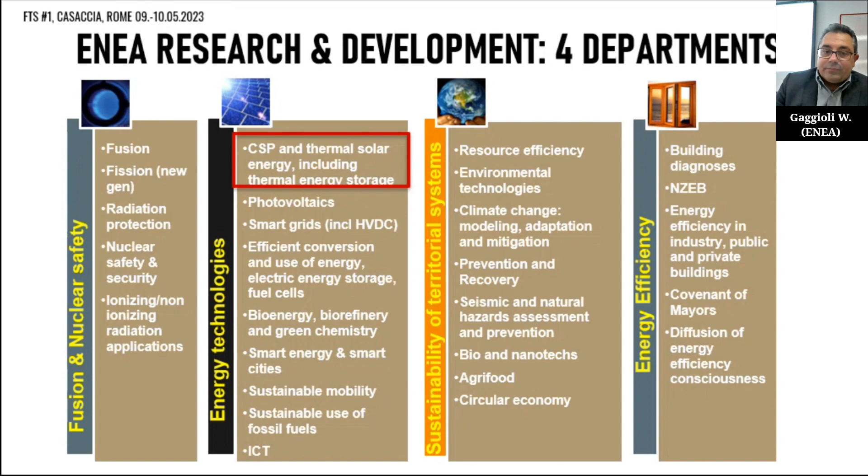The facilities of ENEA are distributed all along Italy. The facility for the division is divided into 3 laboratories. The first laboratory is oriented to develop technology for solar thermal applications.

The responsible for this laboratory is Michela Lanchi. The second laboratory is the technology engineering laboratory, to support the Italian system in building CSP systems, with or without molten salt technology.

The third laboratory is the smart grid laboratory, oriented to study how to couple the thermal storage system, the CSP technology, and in general different renewable sources, into the smart power grid at the local level.

The facilities of the division are concentrated mainly in 3 centers. One is Casaccia, where we are now. The second is Portici, near Naples, where they develop special coating and smart grid applications. The third facility is in another research center in South Italy, Trisaia, near Puglia.

About the facilities present at Casaccia, here all the facilities are already listed. For reasons of time I won't list them all, but tomorrow during the visit you can ask for information about the different facilities.

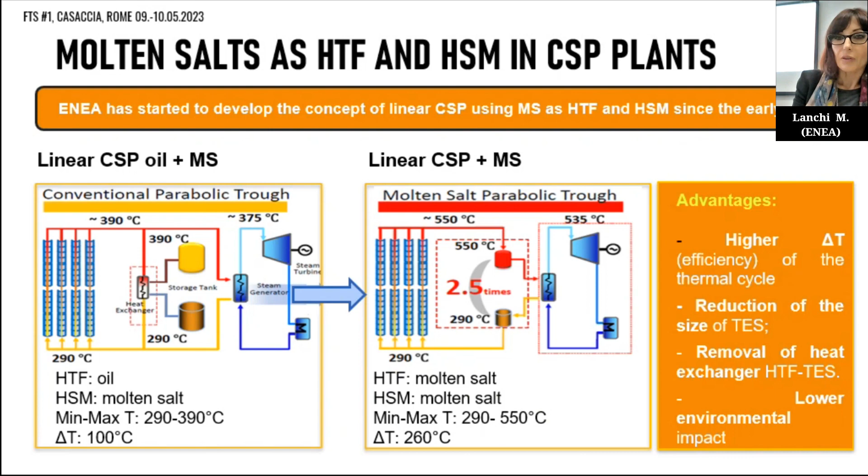Referring again to ENEA, the development of the MS technology, from the design of the components to the realization of the first Italian commercial plants, has required something like 15 years, passing through laboratory testing of components and materials, through the realization of a real-scale facility for characterization of components in a real environment, and through the realization of demonstrative plants like the Archimede plant and the MATS plant, which was realized in 2018 within a European project coordinated by ENEA.

This is a cogenerative plant which produces electricity and desalinated water.

And currently, not working.

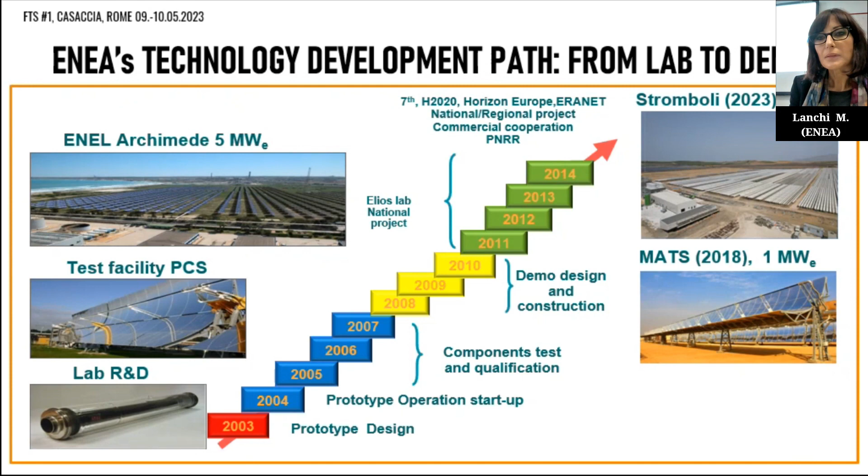Currently, the ultimate research objective in this field is to enhance the energy performance and reduce the cost of this technology. The research activity carried out by DLR, ENEA, and the University of Évora in this field is supported by the use of unique experimental infrastructures, unique in Europe, which can be used for the real testing of real components in a real environment, but also for testing procedures and operational procedures.

Here you can see the PCS plant located at the ENEA Casaccia site, which will be visited tomorrow by the on-site attendants, and the HPS2 molten salt loop of Évora, which is a full-scale molten salt pilot CSP plant, and this facility of DLR located in Cologne.

And now, after this very quick introduction, let's start with the course.

This first edition of the fast track school includes molten salt focused lectures dealing with basic research topics and state of the art, and also a research brainstorming. Particularly today we will have a very quick overview on the use of molten salt in CSP plants, and also for the application of providing heat to industrial processes.

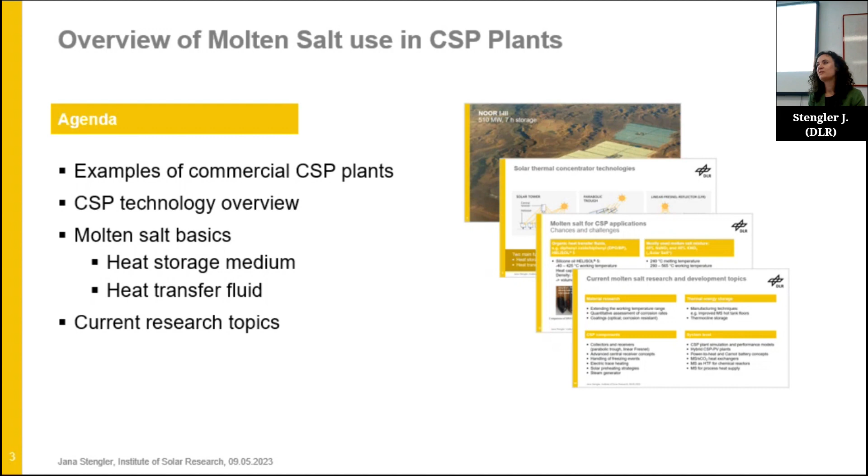So what we're going to cover is examples of commercial plants as a start. We'll have a look at different technologies for CSP very briefly. Then we'll look at molten salt, or the standard solar salt that's been used as heat transfer fluid, but also as heat storage medium. And then we'll look at current research topics to give you an idea about the structure of this fast track school, so you have guidance for the next topics or talks.

So another example that I picked is Andasol. It's the first parabolic trough project that we had in Europe, at least the first commercial one. It was commissioned in 2009, so it's a pretty impressive plant in the south of Spain. Maybe some of you already had a chance to see it.

It's parabolic trough. Then another example that I picked, Gemasolar, also in the south of Spain, with 20 megawatts. It was the first utility scale or commercial scale tower system in Europe, and only a couple of years later, this one was commissioned in 2011, and in 2015...

In the United States, we had the project of Crescent Dunes, also a tower with molten salt. So it's a bigger project with 110 megawatts. So you get a pretty nice impression about the different technologies and how they developed.

There's also a couple of examples from China. I just picked one - it's the biggest linear Fresnel project that we have in the world. I think it was only the first Fresnel project in China. It went online in December 2019. It has 50 megawatts rating and 15 hours storage. It's a linear Fresnel with molten salt also as heat transfer fluid. So this gives you an impression about the different technologies that we're using.

For example, there's solar towers, there's parabolic trough, and there's linear Fresnel. So it's point focusing technologies, but also line focusing technologies. And for line focus, I chose parabolic trough and linear Fresnel. Linear Fresnel basically has several facets, so they have smaller curved mirrors, but they also aim the solar irradiation onto one line focus.

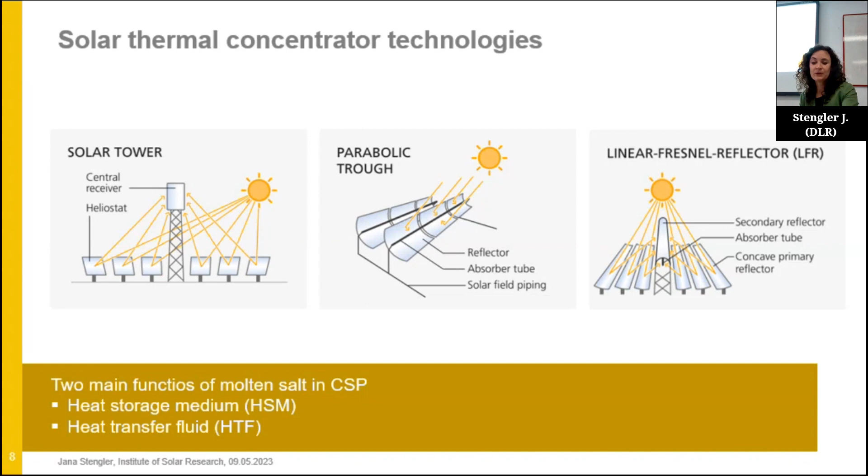And so the molten salt that we use here has basically two functions. You can use it as heat storage medium, that's where it came from - also all power plants or CSP plants already feature molten salt as heat storage medium. And the newer use case for molten salt is to use it as heat transfer medium in point focus and line focus systems.

So let's have a look into molten salt tower technology. How does it actually work? So the standard would be to have a 2-tank system. You use cold salt and circulate it through the solar receiver, heat it up, and then you can directly use it to produce steam, or you can store it in a tank and use it later.

So you have one component that connects the molten salt loop to a conventional power block. And the rest is basically a turbine, steam generator, and so on, as you know from conventional power plants. So you have that conventional power block and two use cases of molten salt. And basically there's a lot of experience on large-scale thermal energy storage with molten salt.

It's state-of-the-art. And for using molten salt as heat transfer fluid, there was some experience in France in tower systems, but also in the United States later in the 90s.

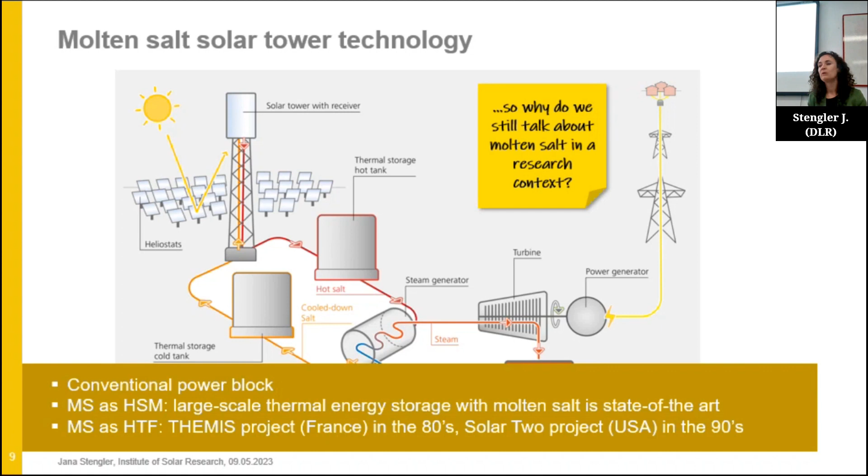So having heard that history, and also having heard Michaela's introduction about the history of ENEA and working with molten salt, you could definitely ask yourself the question: why are you still talking about molten salt here in a research topic? And I guess this is the question that we will answer during this fast track course - to show you what the developments are, what the open research questions are, and also on utility scale.

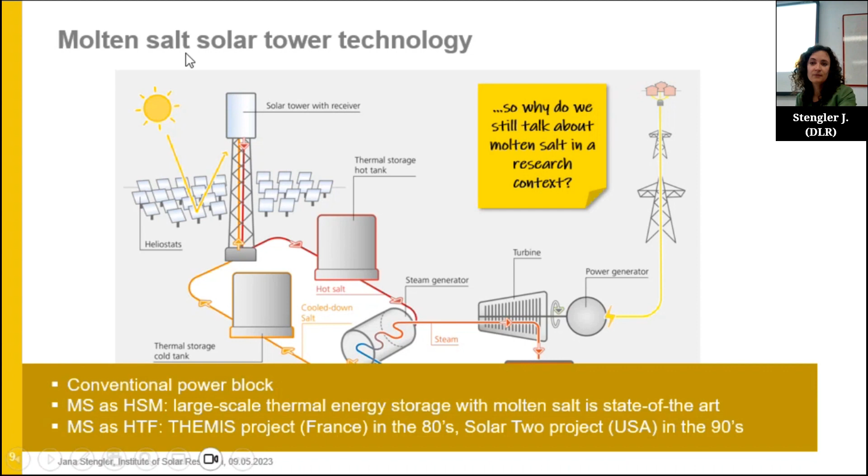Coming back to that first photo I had, that first Morocco, the NOOR facility. What they have installed here is a solar tower plant with molten salt as heat transfer fluid, with storage tanks also using molten salt. There was a project that went online in 2016 and 2018, so it's still state of the art, but they still use oil as heat transfer fluid in the parabolic trough.

Let's have a look into the scheme. We briefly had this before, but let's put it down. In a utility-scale, state-of-the-art parabolic trough CSP plant, you would have one circle in the solar loop with thermal oil, then use a heat exchanger to have another loop with molten salt to store thermal energy and produce energy during the night. Then there's another loop with thermal oil so you could generate steam.

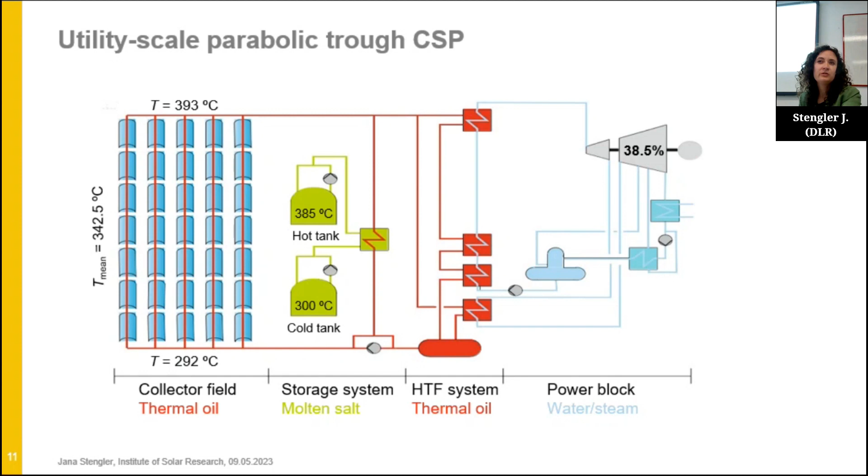If you look at the working temperature, the good thing about organic heat transfer fluids like Helisol is you could use them below freezing point, below 0 degrees C. But it's limited to temperatures up to 400, maybe 425 degrees C. The heat capacity doesn't look too bad actually, but considering the low density, it results in a rather low volumetric heat capacity. That's why you wouldn't use it as storage material, but use molten salt instead, since it ends up having a higher volumetric heat capacity compared to organic heat transfer fluids.

The standard salt mixture used in CSP plants is solar salt, a mixture of sodium nitrate and potassium nitrate. There are other mixtures which we'll cover later in this fast track school. It has about 240 degrees C melting temperature, so you need to make sure every single component of your plant is equipped with trace heating, so you stay safely higher than 250, 260, 270 degrees C. That limits your lower operating temperature.

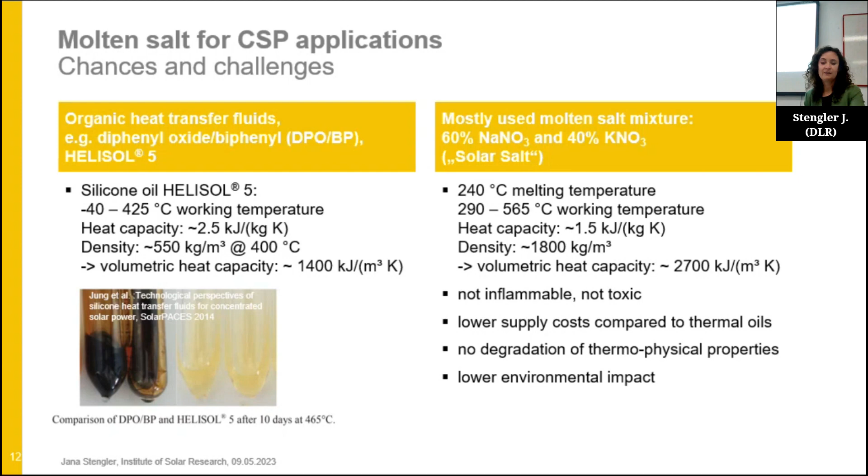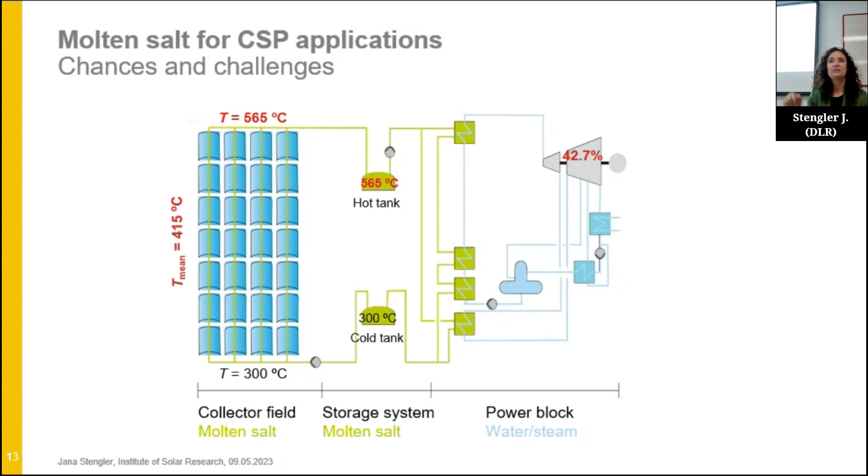So let's assume you replace the thermal oil in the solar loop with molten salt. That has several benefits. First, you can increase the temperature in the solar field itself, but also in the storage tank. You don't have to add additional heat exchangers. I'll quickly jump back - you can go directly from the loop in the solar field to the steam generator, to that heat exchanger.

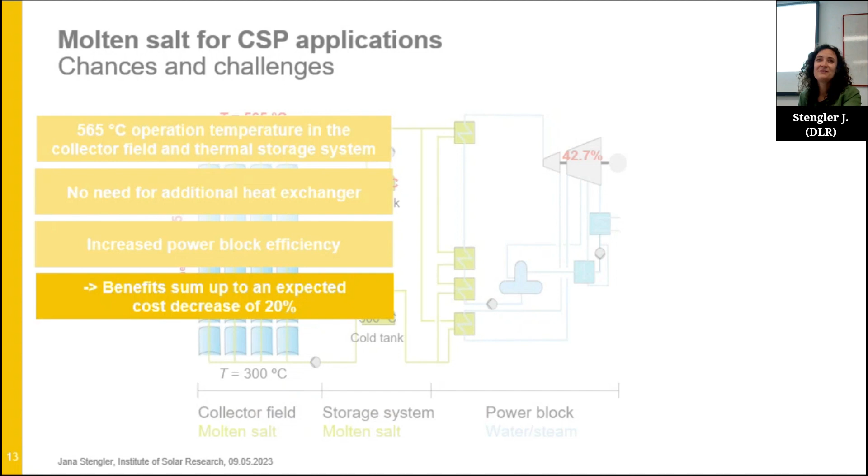With fewer components and higher operation temperatures, you can increase the efficiency of the power block, and in the end that leads to a cost decrease. These numbers are a bit older, but we've done the math, and we expect you could get a 20% cost decrease from this higher efficiency in the overall power block, and also from having fewer components such as heat exchangers. But of course, these benefits don't come for free.

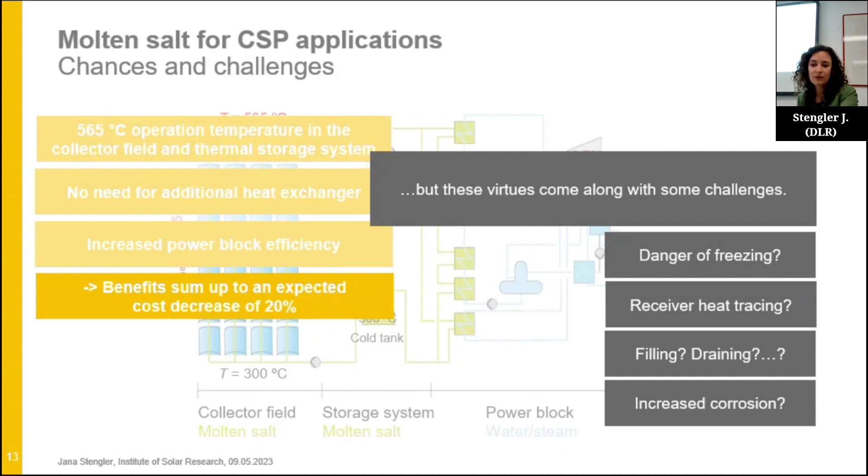Some of those challenges are tackled at ENEA and also at DLR and at the University of Évora. That's a teaser for you to sign up for the next fast track schools as well. One of them will be held in Évora, where colleagues have a research facility for different topics around molten salt, for example, using molten salt as heat transfer fluid in parabolic troughs. I won't go into detail, it's just a cliffhanger for the next fast track school.

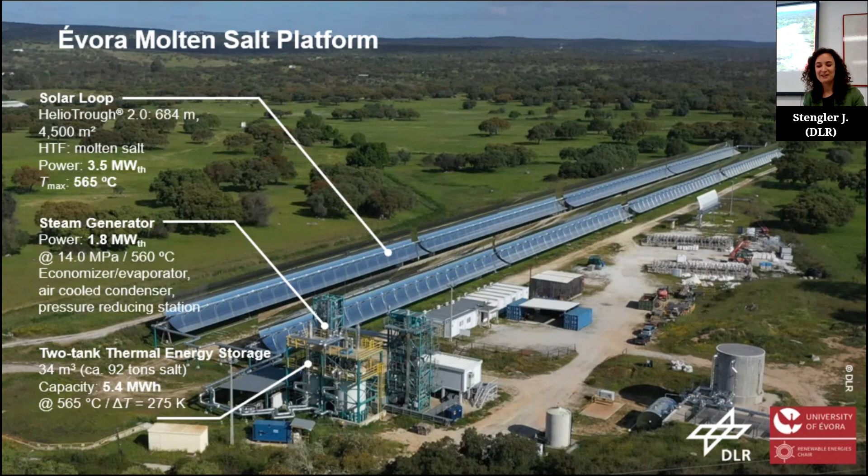That's the exact reason why we have this school here, why we're still talking about molten salt research topics. Because there are some industrial projects, but it's still hard for us to have insight on this.

So my last slide, some ideas, some approaches about new research topics. It's not a complete overview, there will be many missing topics. I try to break it down into 4 different fields. Of course they sometimes overlap, so it's not a clear structure, but it also kind of reflects the agenda that we have for the rest of the fast track school.

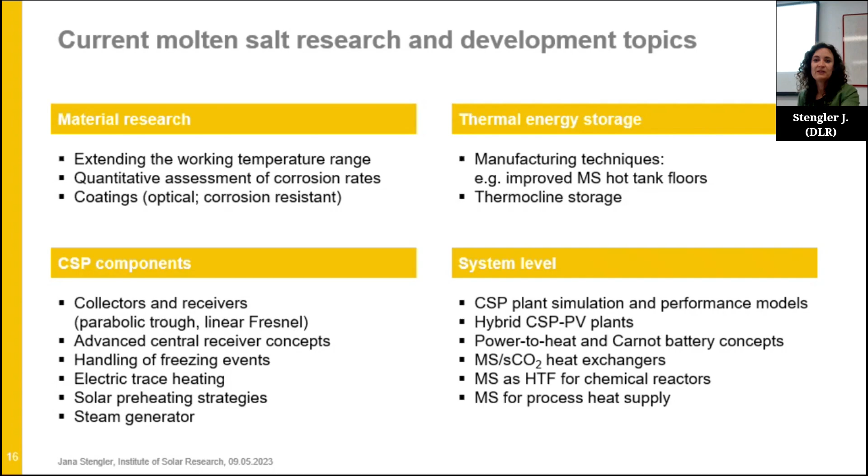This is again a photo that I took only 4 weeks ago when I had the chance to travel to Évora. Again, that's a teaser for you to sign up for the next fast track schools. I'm pretty excited to see your facilities tomorrow here in ENEA. So thank you very much for inviting us.

You're welcome. Let's hope that we will not be forced to visit the facility under the rain, but let's keep our fingers crossed that the weather will be as here on that photo. So with this, I'm thanking you for all your interest and attention, and I hand over to the next speaker. Thank you very much.

Okay, what is process heat? I guess this is broadly known by all of you, but basically we are talking about the use of energy for warming industrial spaces, of course, but especially for use in industrial processes. This is actually the core of process heat applications, the use of heat in industrial processes.

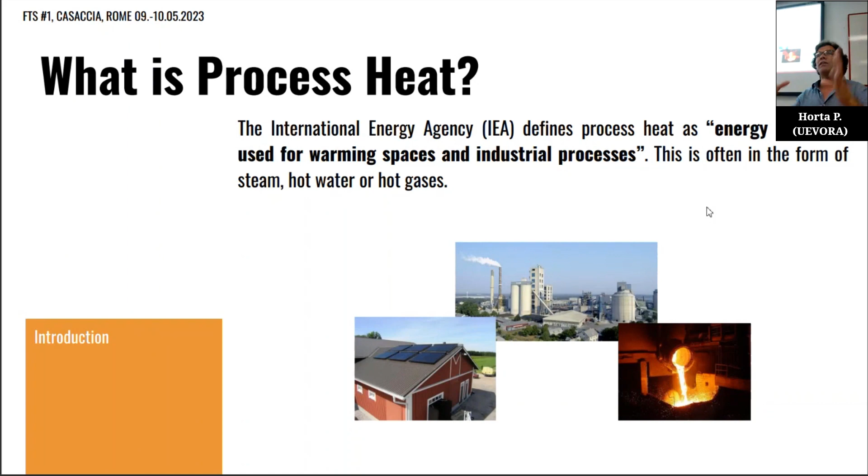If we look into what that means in terms of final energy consumption worldwide, we can have a good estimate. Taking International Energy Agency numbers of 2019, the industrial sector accounted for about 29-30% of total global final energy use. This is total, includes everything, transportation sector as well. Roughly two-thirds of that is used in the form of heat, so we are talking about 20% of the overall worldwide energy consumption. This is process heat, so it's definitely a very significant share of our energy consumption.

One thing which is clear today is that process heat can be a number of different things, and we can classify process heat in terms of its temperature level. We have applications at low temperature, whatever processes occur below 100 degrees - there are a number of them. Then we have medium temperature, processes occurring between 100 and 400 degrees. I must refer here that it's sometimes 100 or 150, 400 or 450, so there are some discussions in this field, but roughly 100 to 400 degrees is the range we name when we talk about medium temperature applications, and then above 400-450 degrees we have high temperature applications.

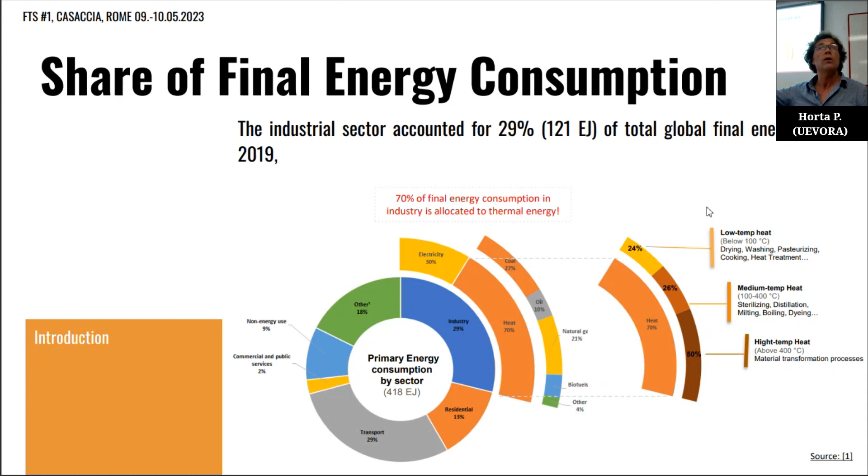So if you look into the share of energy used in processes according to these different categories of temperature, we see that low and medium temperature account for roughly half of these consumptions. The other half is accounted for by high temperature processes. So roughly 10% of the total worldwide energy consumption is in industry in low and medium temperature, and 10% of the total worldwide final energy consumption is in industry in high temperature processes. So, something we should take a look at.

Well, we have already seen that molten salts are an interesting heat storage or even heat transfer fluid. It has good thermal stability, low vapor pressure. How could we use, or how could we heat these molten salts?

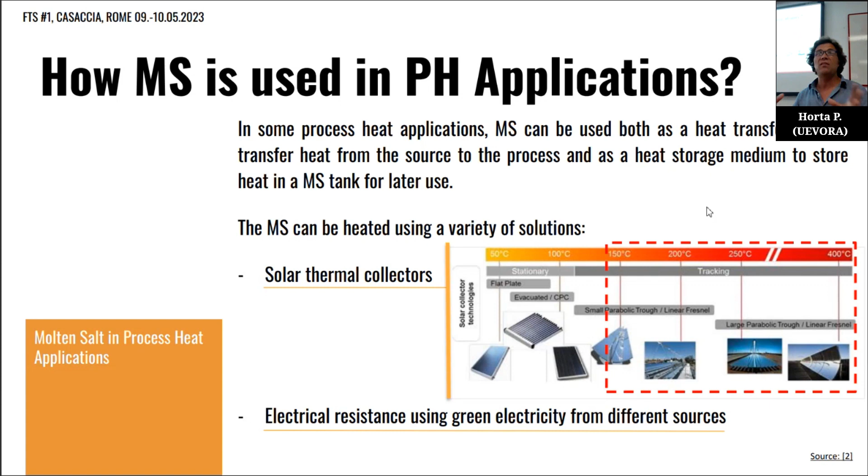Well, of course, with solar thermal collectors, and we have seen here a number of examples of such collectors, and definitely very impressive applications on thermal power generation through CSP. But we could also use green electricity with resistive heating to heat molten salts. So we have definitely the possibility to incorporate different renewable energy sources. So directly solar energy through thermal conversion at medium or high temperature, as we have seen, but also, why not, solar energy through photovoltaics or wind power or wave energy or other forms of green electricity generation. And then using resistive heating to heat the molten salts.

So roughly, if we take the most common solar process heat application and integration, those who are accustomed to process heat topics have already spotted that we are talking about integrating solar energy at supply level. What does that mean? That we are going to integrate this alternative renewable energy source close to the energy supply system already in place. Normally, this is a boiler, generating steam by burning some fuel, biomass or fuel oil or whatever, natural gas most of the times. So we might have a system which in parallel is able to also produce steam alongside the boiler.

So we are integrating this new energy source at supply level. We are not going directly to one process. Industrial users are not very keen on touching their processes. That's something, to those of you who are not very knowledgeable about process heat, I can tell you already. They don't want to touch their processes. If you do something around the boiler, well, they can overlook it, but not in the process. So this is the most traditional way of integrating solar heat into a process heat plant.

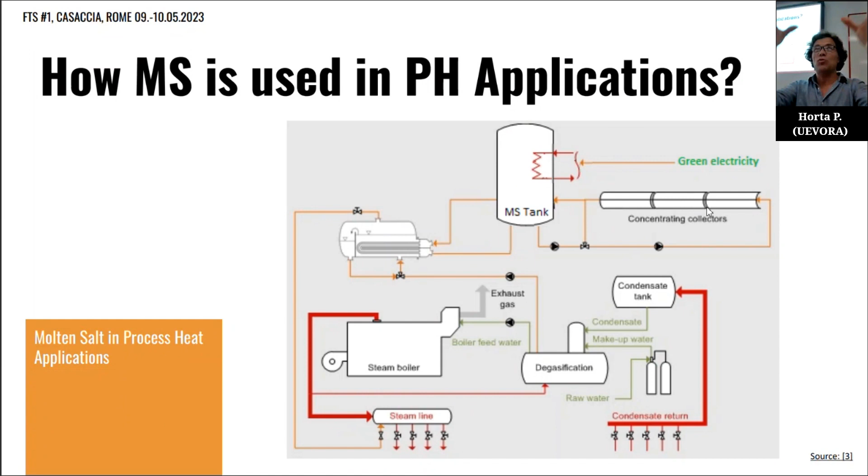And so using these hot molten salts, we could then have a heat exchanger, molten salt to water, to produce steam, and then integrate the steam in the steam distribution network of an existing facility. So this could be one way. There are others, but this is, I would say, the most typical way of introducing molten salts as a means to store energy and to integrate renewable energy in a process heat system.

So as my colleague Jana Stengler already mentioned, why molten salts? Well, they have some interesting properties. They have high heat capacity, basically double what we can see in thermal oils. Excellent thermal stability, very resistant to degradation over cycles, so much better than thermal oil as well. High thermal conductivity, and this is very important whenever we consider the use of such a heat transfer fluid with heat exchangers.

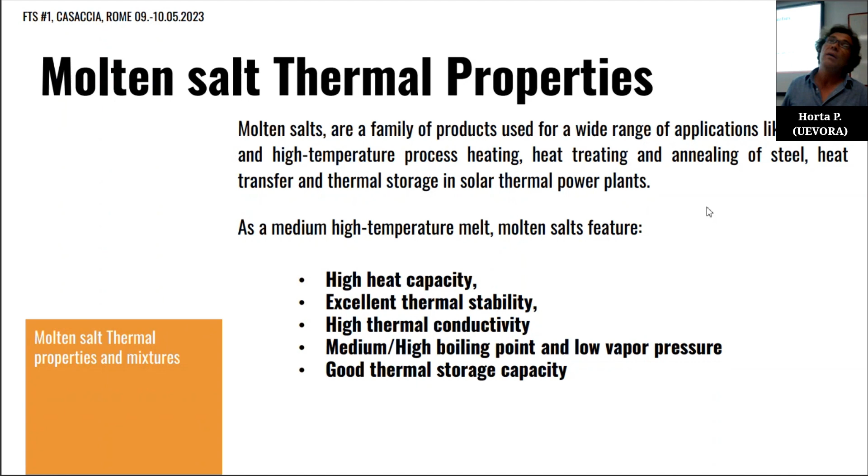This is a very important property. Another extremely important property is that we are dealing with low vapor pressure, which means that if we want to use it at 300 degrees, you know what that means if you have a steam distribution network? 300 degrees, you're talking about extremely high pressures. This is not the case with molten salts. So regarding pressure constraints, we remove them out of the picture, yet there's something we need to deal with: the medium or high boiling point. So these systems need to be prepared to prevent or to operate including the event of salt crystallization. This needs to be foreseen. On the other hand, we also have seen that we have a very good thermal storage capacity, which means we can have more compact storage systems when compared with thermal oil, or even with steam storage, which is a possibility, but not for very high capacities, as we all know.

So looking now into molten salt mixtures, there are different types of mixtures. Tomorrow we will have a lecture on molten salt mixtures where you will see these things in detail. Roughly we can see that we have nitrate-based, chloride-based, or fluoride-based mixtures. The mixtures which have been worked, researched, at least in the solar energy fields, are nitrate-based mixtures.

And most of all, it's called solar salt. We are talking about potassium nitrate, sodium nitrate mixture. This mixture is very well known today. It's state of the art. It's used in commercial plants.

It's very good in terms of chemical safety. It's compatible with standard stainless steel alloys, so we will find stainless steel components to deal with all the hydraulics we need. This is definitely important if we want to bring these into an industrial, into a commercial use. It has also the potential to be operated at rather high temperatures, so much higher than thermal oils, much higher than steam distribution networks, especially if we don't want to deal with extremely high pressures. So we can operate the systems up to 565 degrees.

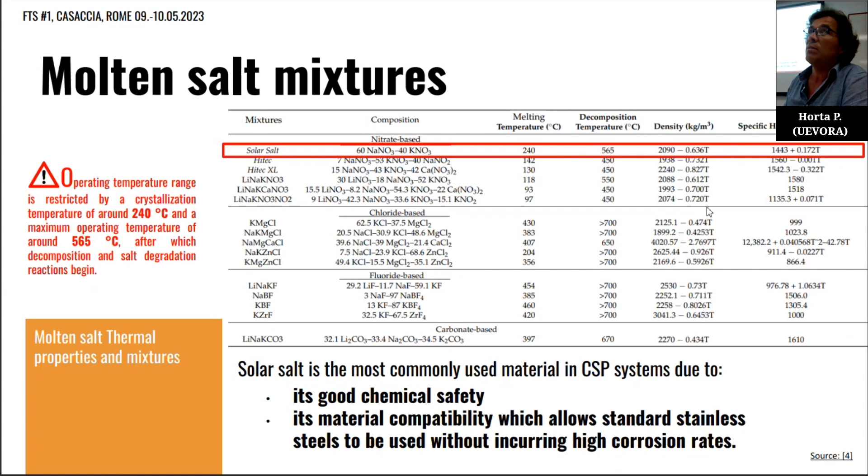Yet we know we have this shortcoming. We need to keep it above roughly 240 degrees, which might be a problem, okay? It needs some consideration.

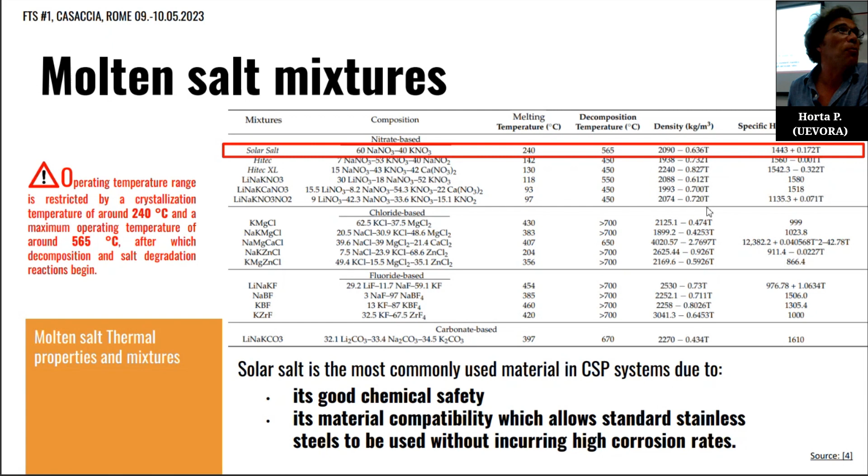Well, but we are now looking into other possibilities. Definitely adding calcium nitrate to this mixture, which then becomes a ternary mixture. It's interesting, because we can actually lower rather substantially the melting point, so we go from 240 to 130 degrees. This is definitely interesting, and we do not change too much of the other properties.

Well, we change something on costs, it's a bit more expensive. It becomes a bit more unstable thermally, so it's more difficult to determine exactly what will be the melting point of this mixture. And there is an aspect which might be important depending on the way we are using the molten salts, which is viscosity. Viscosity is about 3 times higher than with solar salts. So if we need to pump these salts around a lot, if we need to circulate the salts, well, we will have a cost there. So these are things we need to take into consideration.

Yet, there is the possibility, if you think of using molten salts as a heat storage medium under a phase change material concept, what you can actually see in this table is that we have melting temperatures ranging from 100 to 400 degrees. So this gives us a very wide range of potential applications, which definitely is an important thing to mention.

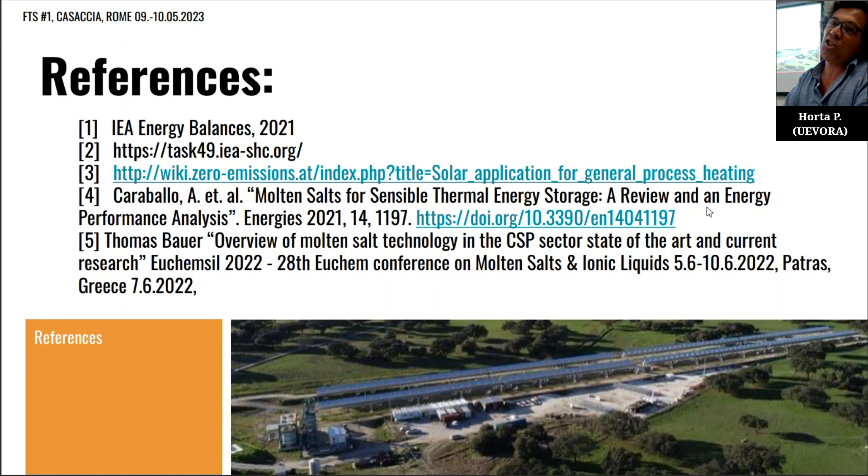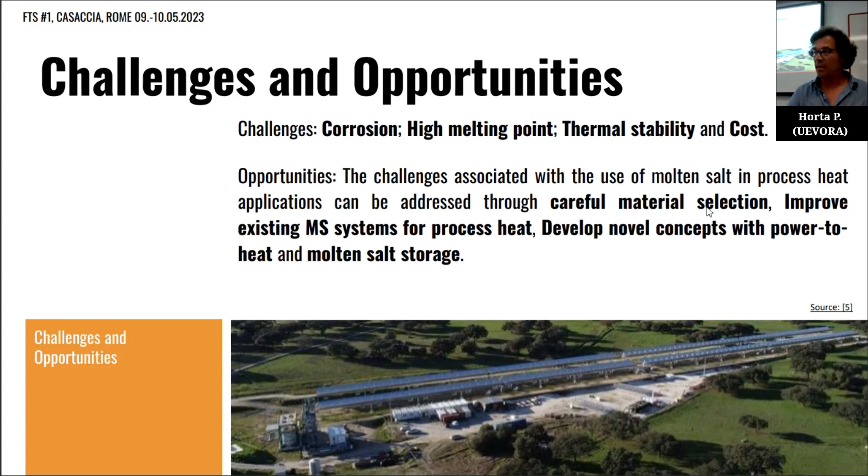Thank you so much. I don't know if you have any questions here, or I don't know if the attendants, the remote attendants, have the chance to make questions. No questions, no questions. Okay, so maybe I've used already my 15 minutes.